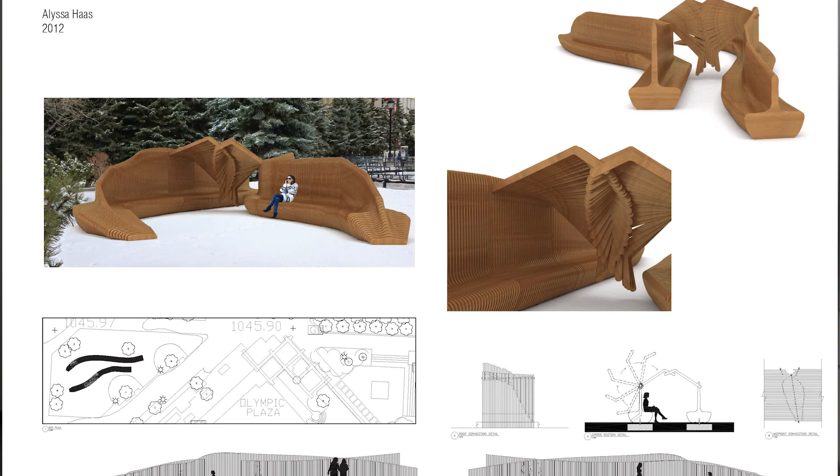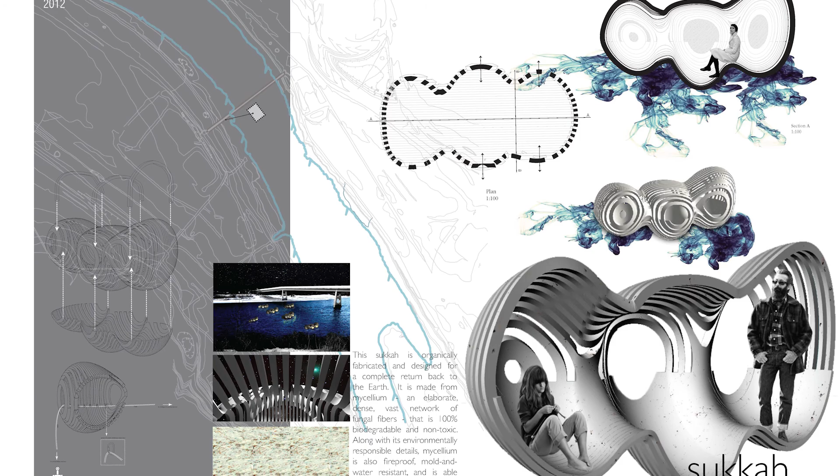And particularly I was looking for something that might be able to engage them in this idea of a sort of parametric or rule-based system that could get them to explore things like scale and material in a very tangible way. And so almost by accident, I was discussing this with my colleague, Catherine Hamill, and she had mentioned it...

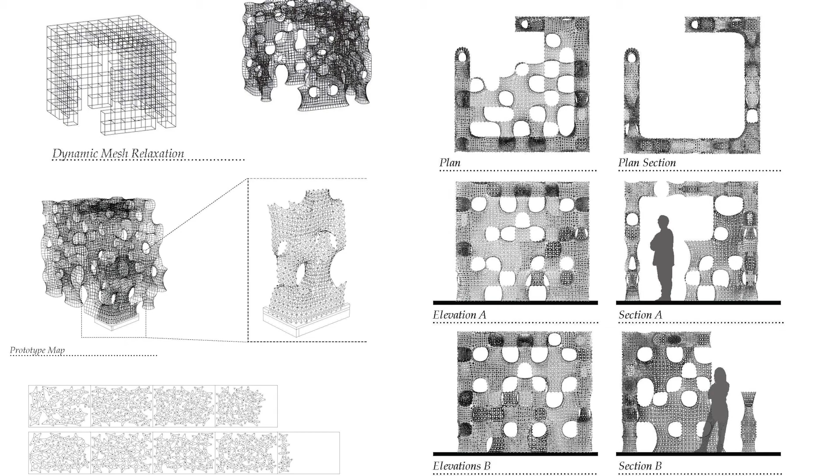...to her neighbor subsequently, who happened to be a member of a local synagogue, and they were quite interested right away in coming in, speaking to the students, and discussing the project and how design thinking might influence something that they had been doing for years as a sort of community sukkah.

Jason was looking at some pictures of some sukkahs, I saw it on the screen, and I asked him what that was. And he said it was a sukkah, and I had no idea what that was. And then he said he was thinking of doing that as one of the smaller projects in the studio too, that he and I were each teaching a separate section.

To see this go from an idea to a college course to now really what is 5 years of the Sukkah competition with the Department of Architecture at the university, to me has been just a fabulous, fabulous endeavor. How great that we as a congregation have this as a sort of, almost, an outreach, I use that with quotations, to the university and the Department of Architecture.

Bringing communities together was an integral aspect of this for me. I think having the university and the synagogue family and community engaged gives us an opportunity to bring cultures together. Within the synagogue family, a Jewish community has existed in our larger Calgary-wide community since the city was founded, essentially. Having bridges built in communities is always a very positive initiative.

I think the most interesting component of that project was that it really engaged a lot of hands-on activity from the community, so there were kids putting stuff into the facade. It's sort of an indestructible tank compared to a lot of the other projects, which take on board the idea of fragility in a much more explicit way than the Sukkah, which is probably the most robust of the projects.

One of the interesting aspects of these projects is that the students come to them with a lot of different faith backgrounds, or perhaps no faith background. So a lot of the early thinking about the projects is really about how do we get into the narrative of the festival, thinking about this idea of moving through the desert and how you might find refuge in some sort of cave or rock formation through that kind of travel.

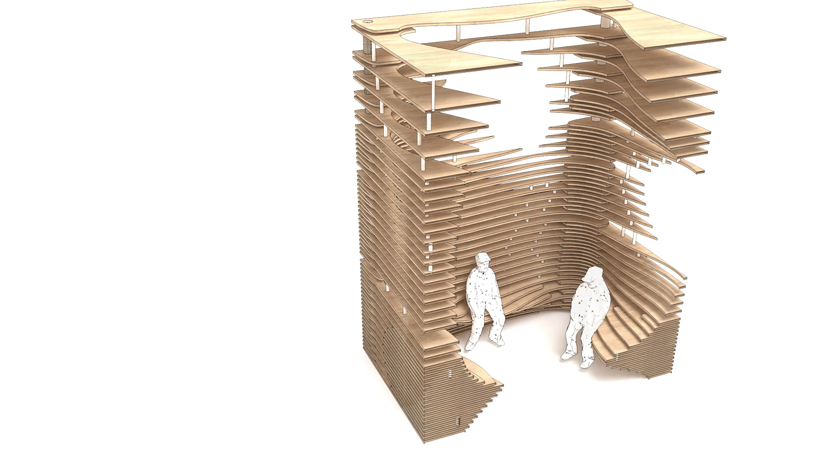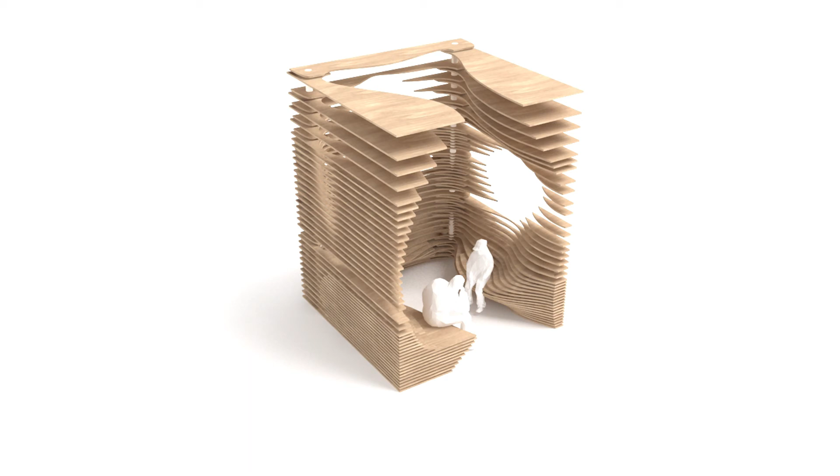I think that as a kind of basis, trying to ground the project in something that was not a sort of overtly religious interpretation of the object, but maybe more related to the notions of refuge and the tactile nature of these big canyon walls in the desert.

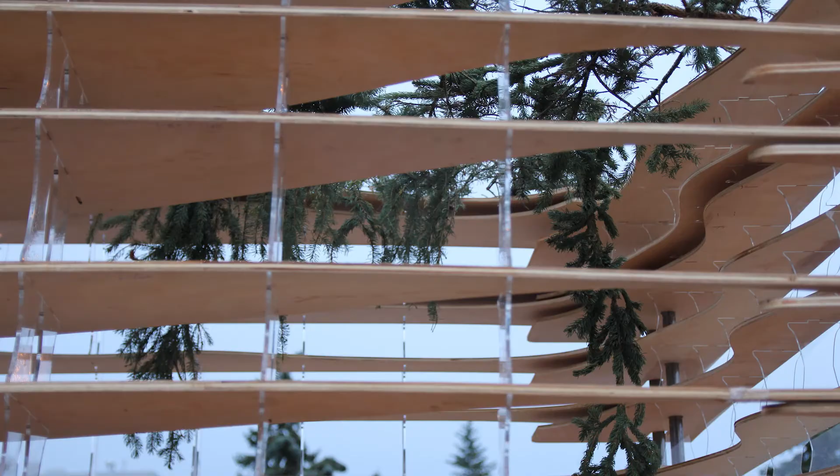The Sukkah wall was more abstract, and as such, people had to stop for a moment and think about what this sukkah was conveying about the holiday. Because of the undulating shape of the sukkah, it was intentional in terms of bringing people into the wilderness. So it transformed and transported people from an asphalt parking lot into the Sinai Desert, and that was just fascinating.

The process the students went through in designing and conceiving the configurations so that this would be something that would endure, I thought was fantastic.

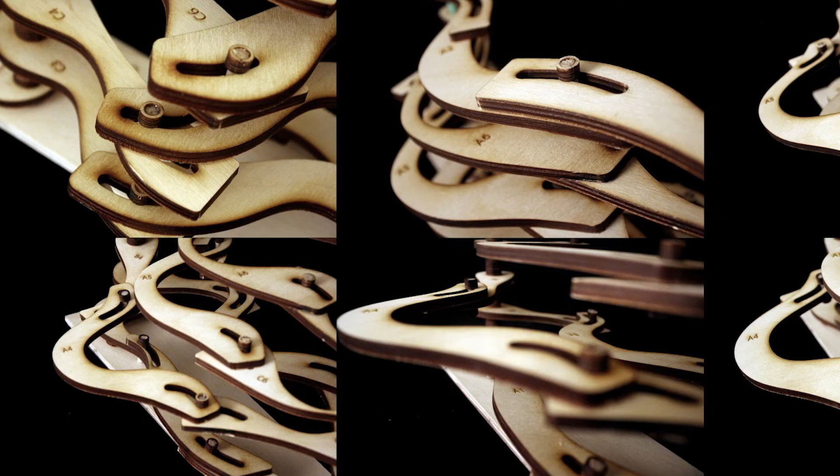It was innovative in looking at the sukkah from two sides, the exterior and interior of the wall, and how people really related to the motion achieved by the various striations of movement, being able to look into it to see the dimension of it, how it reticulated up and down, created a rhythm. And with Sukkot, there is music engaged and happiness. It's a festival, so it had a joyful expression all on its own, and that resonated very successfully with me.

A lot of people, when they saw that, they were thinking of Star Wars, or they were thinking of some fantasy sukkah. They didn't quite get the triangular route involved in it. And once they read some of it, it became much more apparent to people.

If you look at it on a map, the journey they took was a triangulated shape, just without a closed top. So what we did was really stay true to that journey, keeping that triangulated edge, and then literally just extruding it, pulling it, and playing with that triangulation so that from the perforations, if you actually laid this thing flat instead of it being all kinked in on itself, it would make that triangle with the perforations.

This was, by the abstract nature of it, very engaging because it forced people to see things in it. I'm sure people saw a lot of different things as they would looking at a piece of art. The mind has an interpretive ability.

But the idea of tracing the route and using that as a theme with the triangle that, of course, forms the Jewish star, all of that connected beautifully as well. So people had a sense of movement, of going from point A to point B, but not in a linear fashion, rather in a more circuitous way.

The thing that's quite funny about a lot of these projects is that students often struggle with the idea of scale. So when this one is photographed without people in it, it seems like a completely reasonable proposal. But we really need a tiny person sitting inside this one to make the scale make sense, because the idea of inhabiting this one is a bit far-fetched.

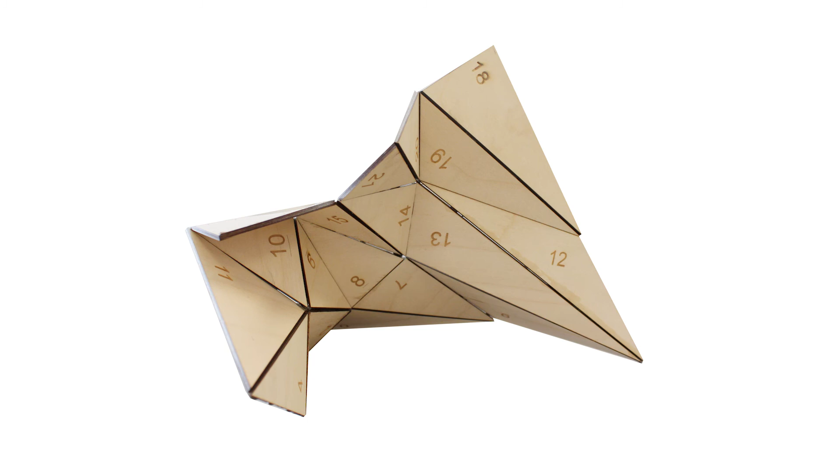That said, I think as a sort of formal and material exploration, it's actually one that was iterated through maybe the most of all of them. The students worked on how materials might come together, the details between holding materials together, and really considered the idea of luminance and light passing through this thing in a way that I think a lot of the other projects didn't.

It was interesting, there was a lot of like, okay, let's do this weird angle thing, and it's just like, no, let's make it linear, bring it down to its basic geometry components, and it's a triangle. That's what it is. So let's keep it to that instead of trying to make a weird kind of triangle, because a path is never perfect in terms of walking. So we narrowed it down to be as linear as possible, and then inverted that into the actual project itself.

Our project was basically to create the architectural embodiment of history, put it that way, because the project, in literal and metaphorical terms, tried to convey several key aspects of their history and put it in physical form.

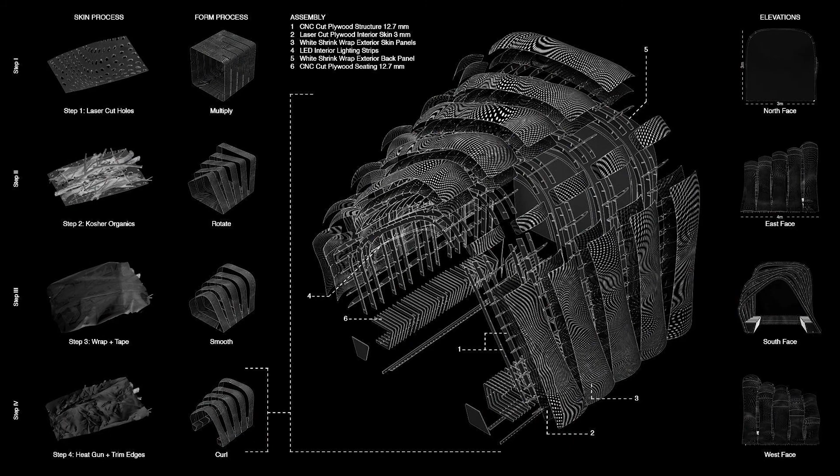It brought in another aspect of the holiday that hadn't been touched upon by the other Sukkot. That was the one that really played on the Star of David, using the rotating idea of the triangle to get people to imagine how the Jewish star was captured in this structure as well, a symbol of Judaism. It also was a symbol of the four species, because of the four different vectors here. So there's a lulav, etrog, arava, and hadas. These are the four different plants used to symbolize the harvest, and it evoked those different symbols as well.

The interesting aspect of this project, which I'd say builds off the one before it, is this idea of a layered system. In fact, most of the projects have some sort of layering between a plastic translucent material and a natural wood material. I found that to be an interesting interpretation in all of them, in terms of how you describe something temporary through the materiality of the object. I think they've struggled with different ways to do that while still making something that doesn't fall down, and avoiding making a super rigid box.

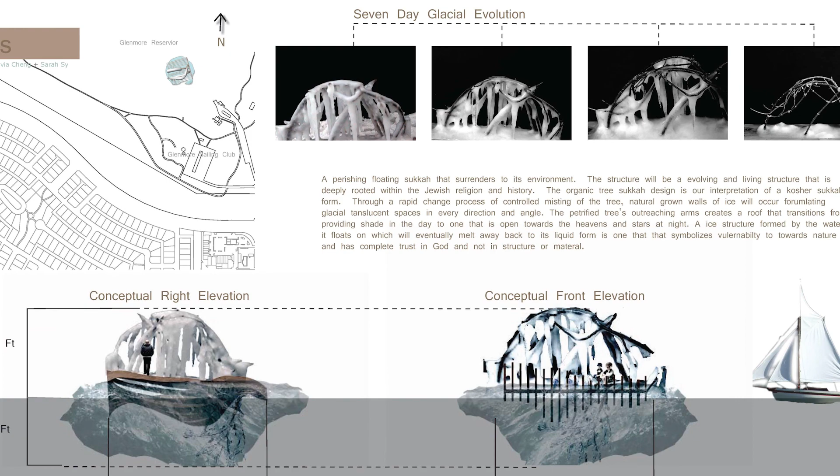The other thing I think with the rabbi was wonderful is how much he was open to all the ideas. I mean, one of them was, I think, an ice island that melted over time. And he quite liked the range and the interpretation of what the sukkah was about.

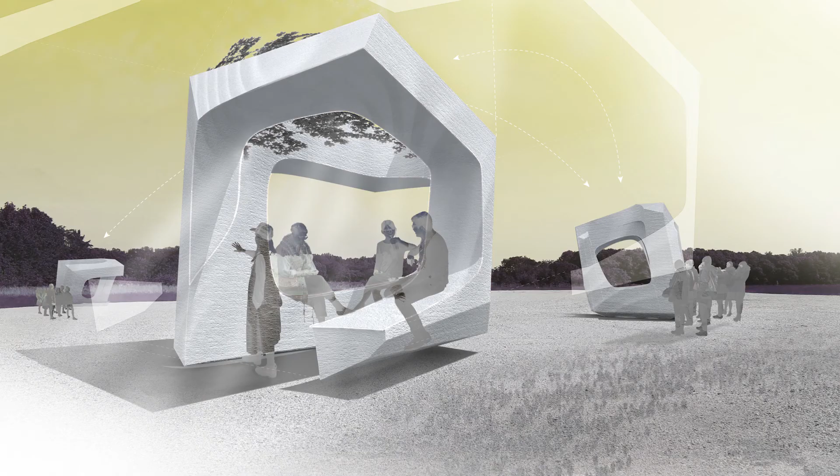The last Sukkah was the subject to change Sukkah, which took the Hebrew letters of the word Sukkah. There are 3 letters: there's the closed one, then a 3-sided one, and the last letter, hey, is 2-sided with a kind of partial side. The tradition says you can build a Sukkah in the shape of any one of those letters, and it's then proper. So those letters evoked the different ways the sukkah could potentially be built, and by changing them around, it gave us a whole other perspective on the meaning of the letters, because in Hebrew each letter has a numerical equivalent, and each letter has a mystical meaning to it. So those powerful messages came through by just looking at the letter.

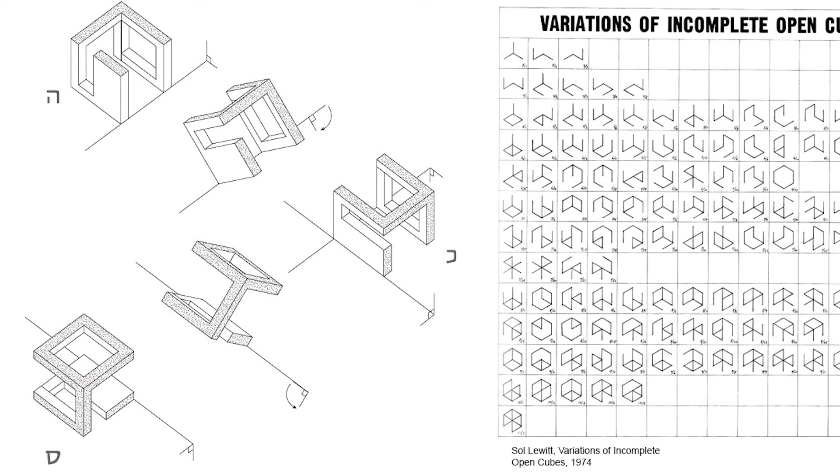So the vision for Sukkah number 5 was that we wanted it to be different for everyone who engaged it. There's a lot of symbolism and meaning baked into the form. The 3 Hebrew letters for Sukkah are projected onto 3 of the elevations, and that yields a kind of space or object. So depending on where you approach it from, and also depending on the way the object is oriented on the ground, you're able to read it differently.

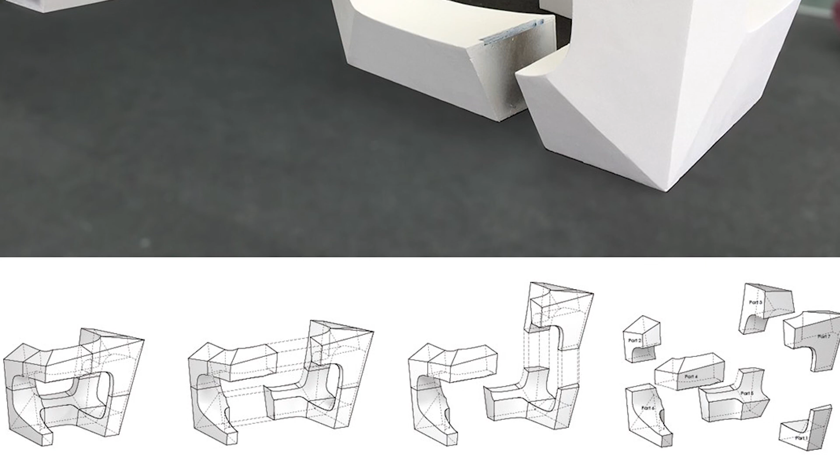There's also a lot of history in terms of the Sukkot of wandering through the desert, and so we have these meandering edges that run through the form. So there's this notion of discovery and arrival that's also baked into the form.

Our sukkah was built in 7 parts. Constructing and fabricating that first part was a steep learning curve, but after we got that one done, the rest went pretty smoothly.

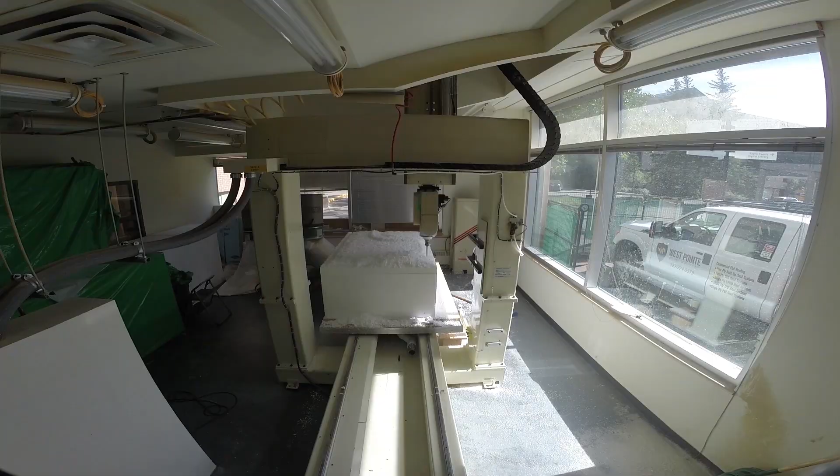Working with the CNC, playing with foam. Breathing in foam.

The idea of embedding characters into the project addresses a challenge with all of these: how do you communicate an idea within a formal strategy to people who are not trained in design? In this case, they had the smart idea of taking the Hebrew characters that made up the words around Sukkot and translating them into a formal gesture.

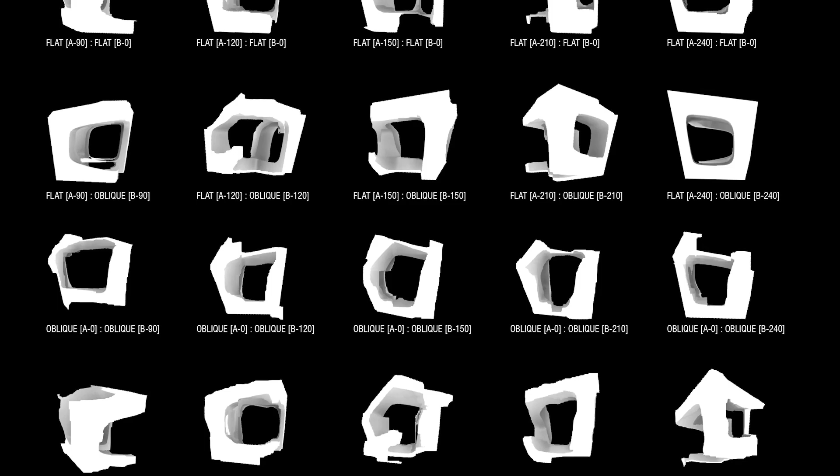My post-professional research was very much investigating computer vision and the opportunities of multiple readings on single static objects. Josh and I were talking a lot about it at that time, and there was a discussion we were having. He conceptualized a sukkah that could have many different meanings when viewed from many different points of view. So there was a dialogue going on, at least with Josh and I, about multiplicities of readings, blurriness, and how you could understand the same thing in different ways, both through physical observation and computer vision, machine vision, or algorithmic observation.

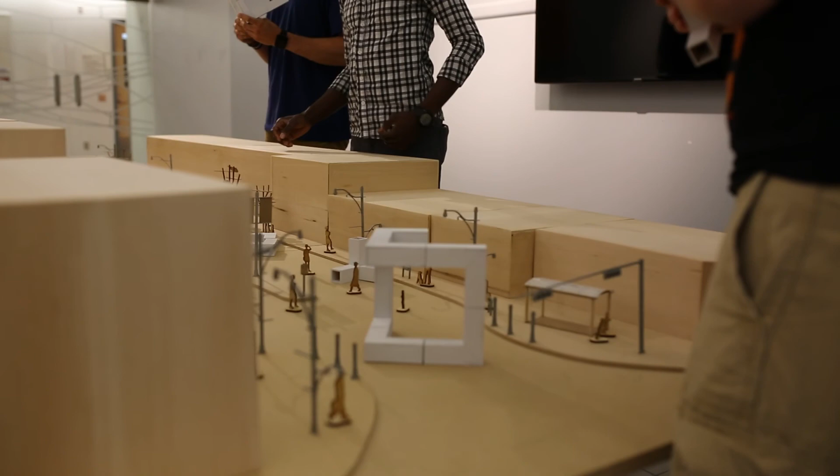Working within the laboratory for integrative design, we really try to take a holistic view of how we're going to execute the problem, understanding that moving from point A to point B is not always a straight line. We see how we can compartmentalize and break down the problem rationally so we can build in contingencies. It's about building a robust work plan that allows us to execute efficiently, while understanding there's always going to be hiccups. We try to anticipate them as best as possible, but also know the tools at our disposal well enough that we can bully them into doing what we need when things don't go the way we want.

Giving the students the opportunity to learn about Jewish background, history, culture, and religious beliefs gave us the chance to dialogue with them about their own backgrounds as well, opening a much broader discussion. I think that was one of the successes—it wasn't just our project with them fulfilling academic requirements. The fact that they took the time to learn about our beliefs, why this holiday resonates, and why it's important within our festival structures, was a real plus for us.

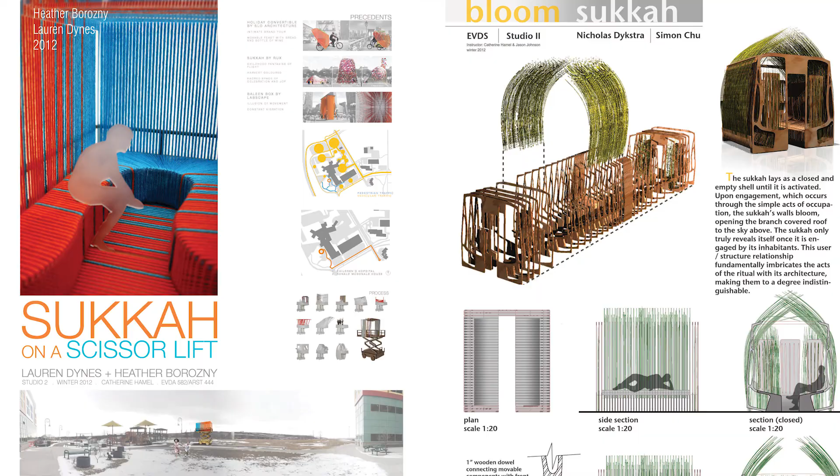To see all these different sukkahs reimagined, and to see the breadth and depth of how you can take a religious symbol and expand upon it, really helps me and other congregants here have more depth into what the symbols of the holiday can mean, and in some cases should mean. You want to see something have a life, be sustainable in a new environment, and be able to stand on its own, revealing something new to everyone each time they come through the space. And that's what this does.

At a coffee shop one time, a guy looked over our shoulder and got really emphatic, saying, 'That's an amazing design, I love what you're doing.' We hadn't even told him anything about it—he'd just seen our 3D model and was excited. Then we told him it was for a Sukkah, and he said, 'Even better, I love Judaism.' It was really fun to see that reaction. I think he was Jewish. He was a fan.

No, that's fine, it's distracting. But working with Josh and Jason is distracting too—they go on rants. There's a nickname for Jason in the lab: the Time Vampire, because he sucks your time.